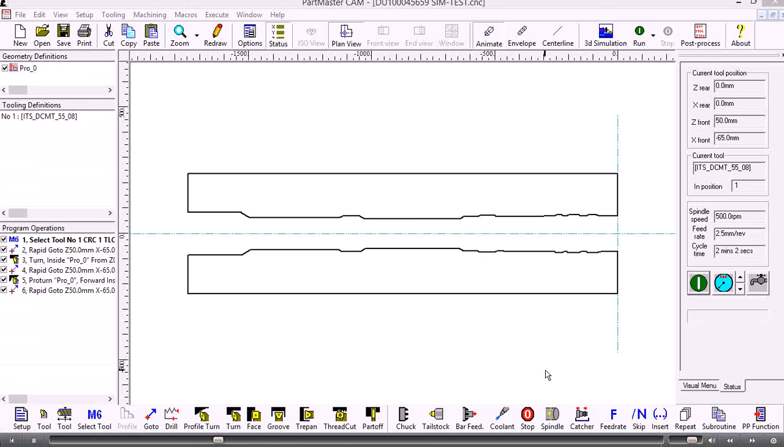So in this example here we've got a component. So if we switch on the tool animation and then just run the tool, so this just looks like a regular sort of lathe component, and if I just zoom in a wee bit more on there, you can see.

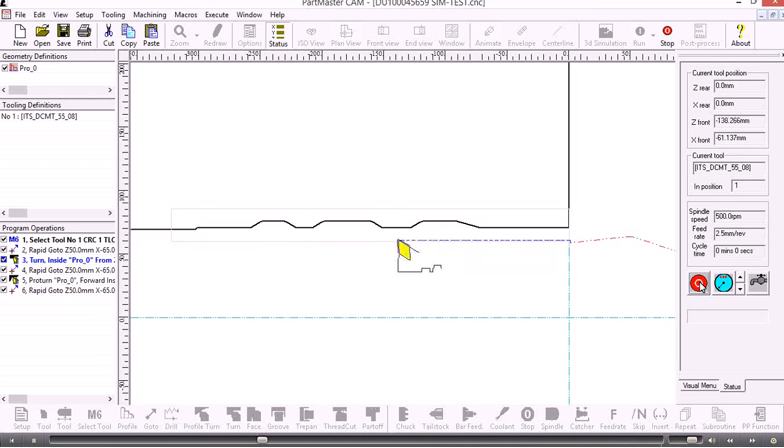But actually what's happening here is that the tooling is in the form of a cartridge where the Z movements are controlled by the Z axis on the machine tool, but the cartridge moving in and out in a diameter is controlled by a subsidiary axis on the machine, which is the U axis, which runs down the center of the spindle. So as the U axis moves in and out, the actual tooling itself moves in a radial fashion to cut the part. So you'll see more clearly when we come to the simulator.

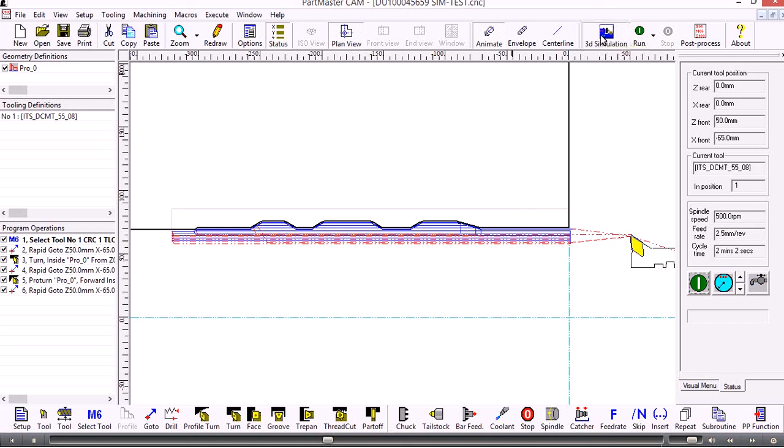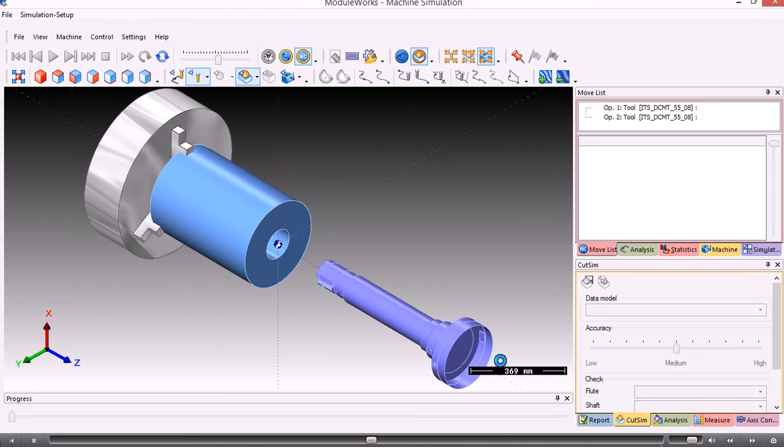So we run the simulation, and then when we're using the simulator, we've drawn up some special tools. The tool holder, or the arbor, if you like, has been designed as a special feature. So if we switch into this mode, and on this particular machine there isn't a turret, so the component is mounted along a horizontal table.

So if we look at this in that plane, so this is the tooling here, so the component moves in and out along the Z axis. The U axis, which runs down the center of this spindle, actuates mechanisms in this part of the tooling which force the cartridges out in this direction, and that's actually what cuts the part.

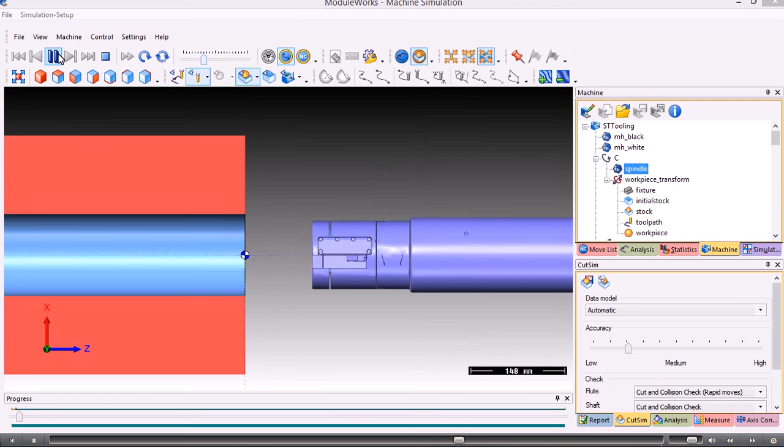So if we zoom in on there and we just run the simulation, you should see how this is working. Just slow that down slightly. So the cartridge is moving ostensibly in the X-axis in and out, but it's controlled by the U-axis, which is running down the center of this special tooling system here.

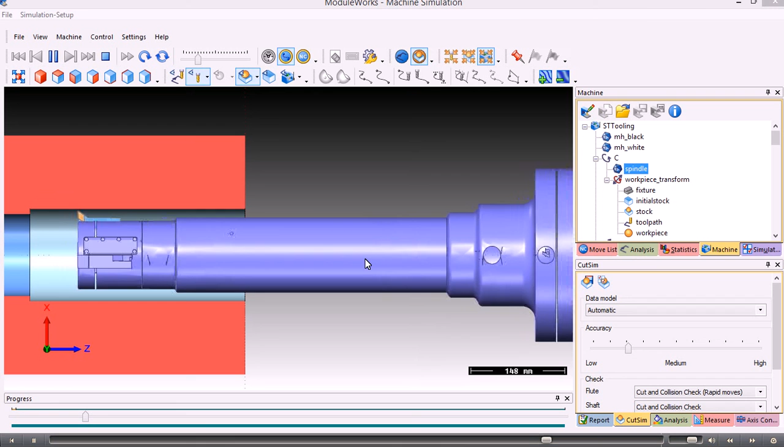Now obviously there are limits to the amount of travel that each cartridge can take from a starting diameter to a finishing diameter. So there are various cartridges which cope with different diameters, and of course the cartridges use standard turning inserts. But don't forget, this is happening on a horizontal machining center where the component is stationary and the spindle is moving. So if I just zoom in on there slightly.

So along with the machine tool simulation, which checks any collisions for the tool tip, the cartridge or the arbor, then we can check exactly what's happening within the bore. When it comes to a tool change, then obviously the operator needs to change the cartridges between a roughing and a finishing tool.

Okay, so that's it. It's a really neat application which adds quite a bit. Main uses are for heavy industry, oil and gas exploration, that type of thing. Okay.